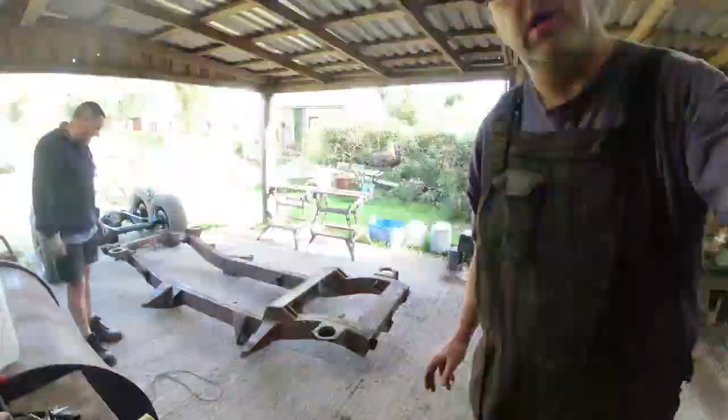So this is the back end of the chassis, off the scrap chassis, off the donor. What I basically did was chop it right off against the middle cross member, the one that the A-frame bolts to, and that the Boge self-leveling strut bolts to, because I've already got that part on here. So that's in good order, and then I've got the rearmost cross member, which is where the tank forward mount goes onto.

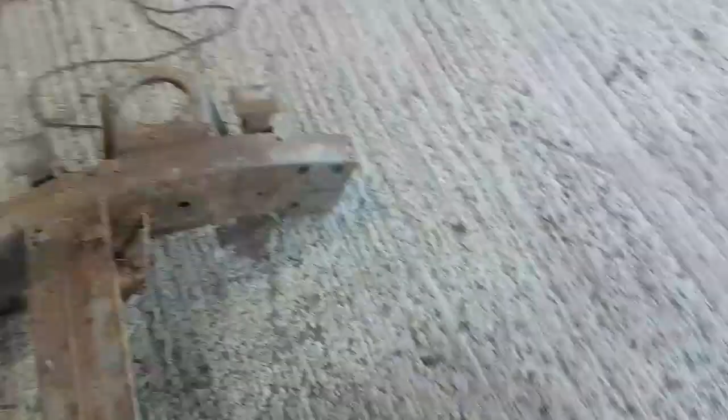And then we're looking at this. So this is the bit that's then missing of that chassis in its entirety. So what we've done here is cut along the outside edge of the butt weld that goes along the chassis.

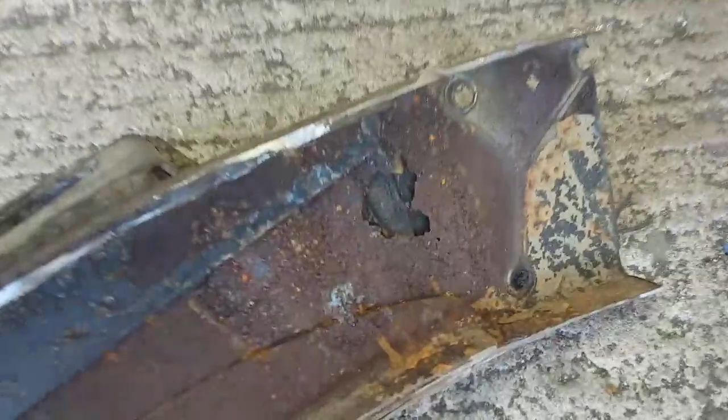The reason I've taken the spring mounts off is because there are holes through the original chassis on the outer edge, and it's been patched, and I'm not terribly happy with it. You can see that, that's not pretty. So judging by the other welds I've been messing around with, I decided I'm going to cut those off.

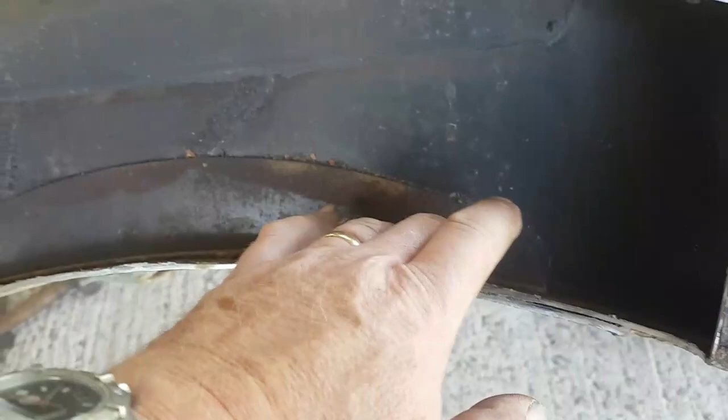That's probably also the easiest way to splice these two parts of chassis back together again. Because on the inside of the chassis rail, you'll notice how clean this is. On the inside edge of the chassis rail, we've got these big half-moon shaped strengthening pieces, top and bottom.

Now I've not disturbed those on the main part of Bob's chassis, and when I cut that in exactly the same way, I'm not going to disturb them on the inside of the chassis. And then it's a case of, we will flap back in here and take off the remains of the outer half of the chassis.

And we'll do the same with that one. We should be able to get a nice overlap weld on this, and the only non-standard weld we're going to get on this is along that edge there.

Now that is most of the bit that I need now. It's upside down, you can see what I've done there. Spring mounts, got the reinforcing plates on the inside. Cut it inboard of the original lap weld.

I'm going to grind all this lot back, cut it gently, see if we can get the two skins separated. So we want the... no, that's wrong, that's just wrong.

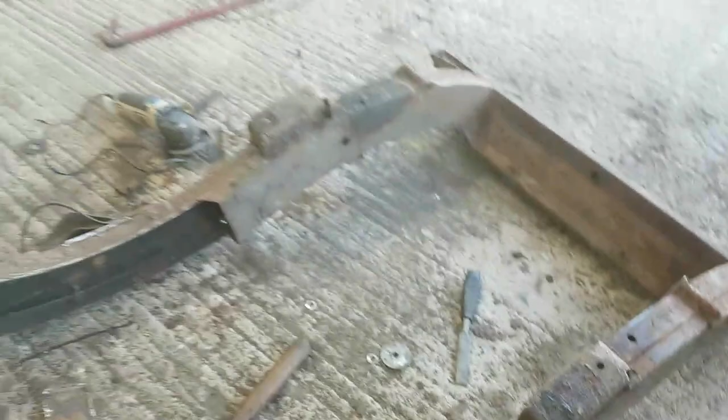And then here, we've got the remains of the inner side, and I'll be able to get that plate off down there. That's good, because I need that. I've got two of those to get off.

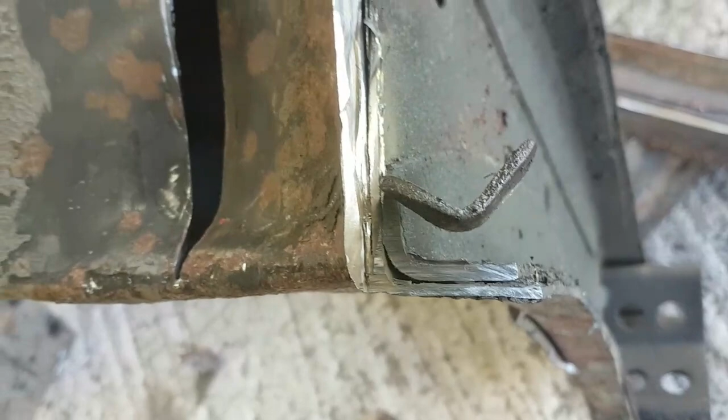But yeah, I think we are getting someplace. Okay, butchered this rear cross member a little bit, but I don't need that bit, I need that bit.

Bloody hell. Now, there is a reinforcing piece in here. I think it's like a top hat piece in there, which I'm going to keep hold of.

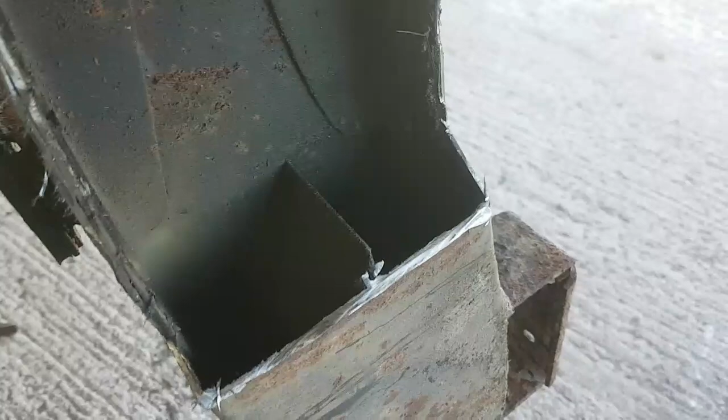And that also explains what some of the stuff was that I found in one of these holes. It's kind of inside the chassis, just by the rear body mount, rearwards of the thing. There's a little top hat welded piece in there.

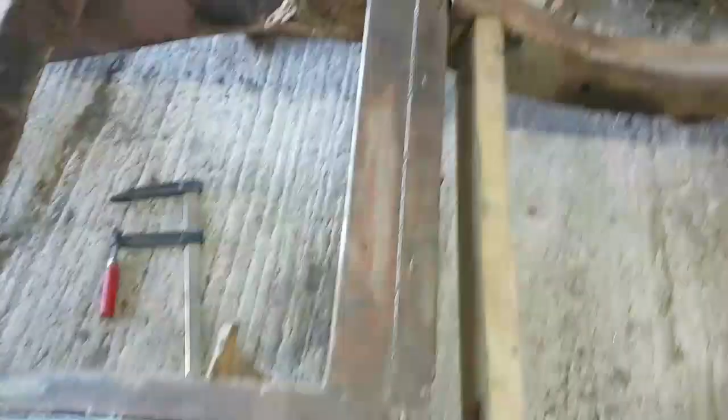As you can see, it's a little bit wider than it needs to be on both sides because I've splayed the chassis rail out by a good half inch. It's probably going to be nearer an inch by the time we get up to here, which will be about right. So I'm going to knock the piece of wood out in a second once I know it's not going to be too much of a wrestle to get into place.

And then it's a case of, as you can see, this thing moves around fairly easily. It's going to be a case of making sure the bottom edge is sitting underneath the flap, which it is. I'll double check all of that. I put a couple of big blobs of weld in there.

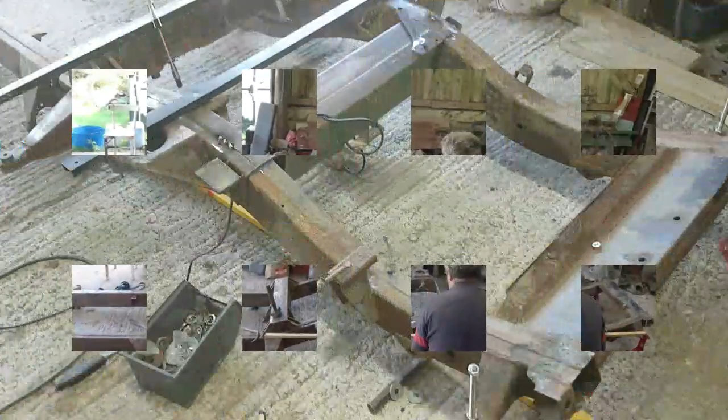Measuring, and measuring. Everything, absolutely everything lines up except for one thing, the wheelbase. And it's doing my fucking head in. So I'm going to double check it now.

So basically if I measure from that point there to the end of the chassis over here, it's right, within a millimetre or two. I need to be more accurate with it, but basically I'm just trying to get the chassis level by putting washers underneath it using my big spirit level, then using drop lines and so forth to get everything right.

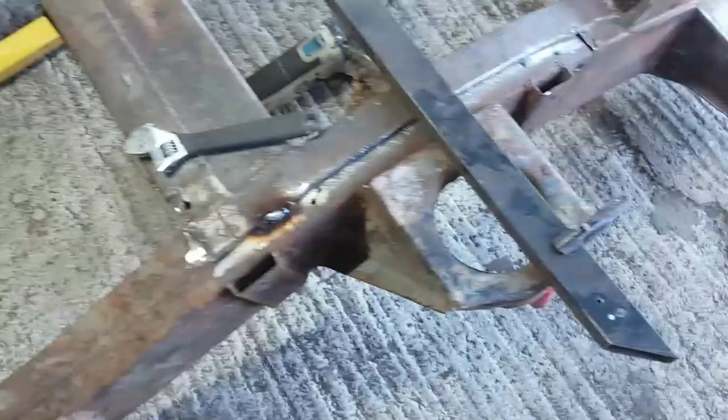I've measured out the centre line of the rear axle turrets as per the diagram, and the distance from there to the back is perfect, which is why I know where the measurement point is, because those turrets were part of the slave chassis, so I know that hasn't been adjusted. It's the distance between that turret and that turret that I'm struggling with.

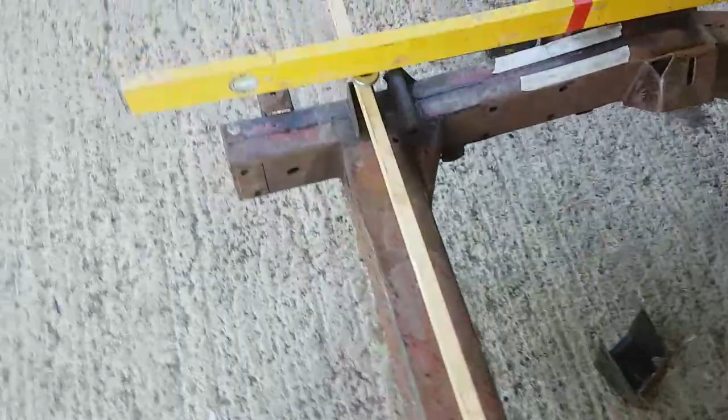It's about 1.5 inches out. We're still measuring. So basically what I've been doing here, just to explain, is the chassis is obviously not level. It's got quite a curve to it, up and down and up and down and up and down.

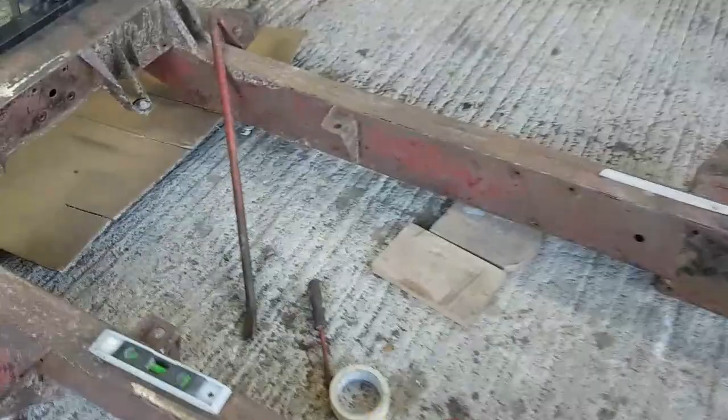So what we're trying to do then is find a level point. We've got the chassis levelled up on the floor anyway, so the centre rail is level. Might need a new bubble for that spirit level soon. And then I take a measurement using washers underneath a cross beam to there.

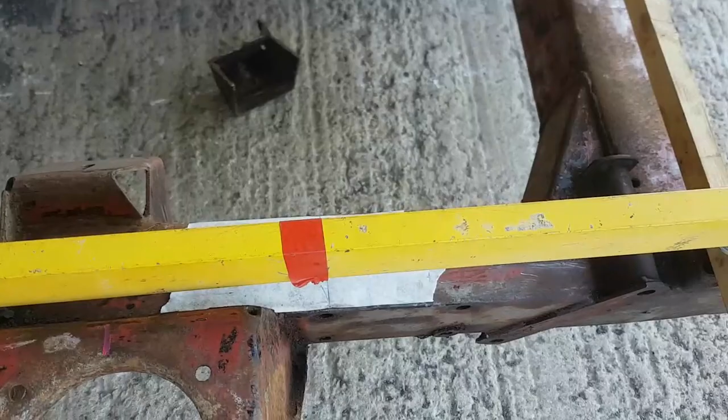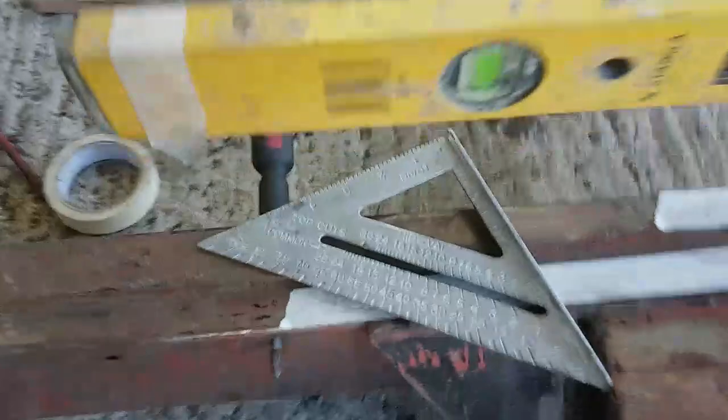I've marked up the measurement for the holes I'm talking about here. So those lines there, I believe, are for the centre of the bolt line that's there. Those lines there for the centre of those bolt lines, they absolutely are perfect. The measurement is perfect. I need to measure down to this fella here, and this was to find the centre point of the

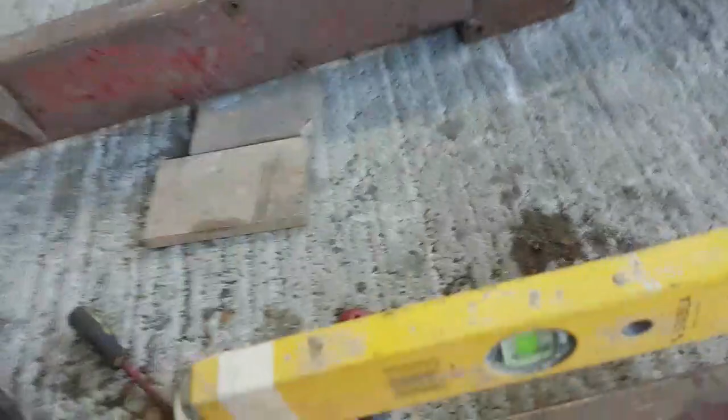front strut. So I balance my right angle on there. It's level and it points at the screwdriver. Okay, I'll get a bit closer than that just by using a straight edge along the edge of it. I measure that, and I'm still getting no real understanding as to why.

Well, this is turning out to be fun, but it's always best to measure 55 times and cut once. So what I've done is I've bolted the original spring turrets back onto this chassis. Not bolted them really, just clamped them on. You can see where the marks were. I haven't really cut any more off this chassis.

I've only ever cut things off the donor part, and I've got this thing so that I've measured between the spring turrets, measured the centre of the turret as I would do normally. I've reset that one based against the baseline, measured the wheelbase: 99 inches.

So I can only assume. Well, I can't assume anything, can I? What the fuck? It tells me the wheelbase should be 100, and I can't get 100 out of it.

Okay, I'll quadruple check this thing. I measured the datum point accurately from the chassis, which is uncut. I even double checked it with that one. I certainly checked it with that one, and that one matched on both sides.

My Pythagoras triangle, by the way, I tried it on the scrap chassis, and it fitted beautifully. So now I've got the start point for the black pole as it goes across there, that piece of black over there. So that goes across, and then I measured

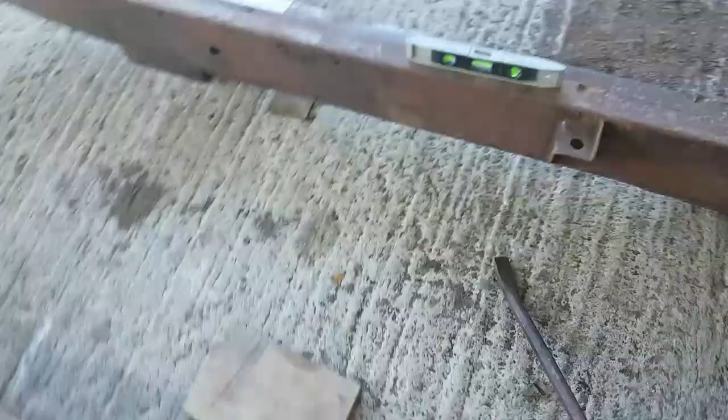from that directly out and marked up the old original spring turrets, which all match up beautifully. I put a straight edge across it, measured it out: 99 inches to the millimetre, or to the thousandth. I don't know now.

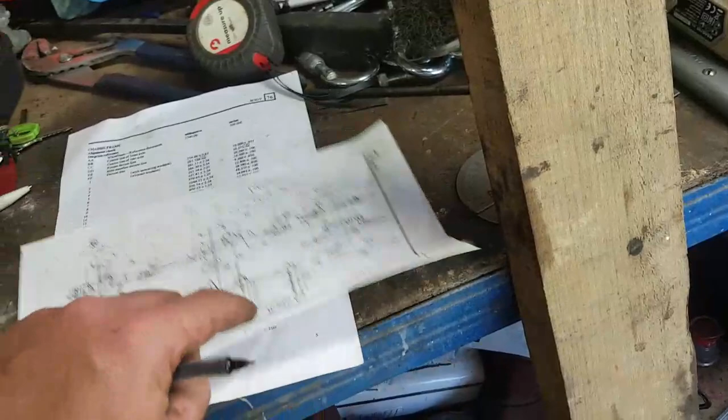Why the fact would they put in it that it's 100 inches when... I mean, I don't know. I really don't know. And I've even been marking out 30 centimetre increments and 12-inch increments, double checking belt and braces all the time. And I cannot get this thing.

So I'm absolutely confident now. FF as a datum line is in the correct place. CC, which is the centre of the rear axle, has a gap here. Why is there two lines there?

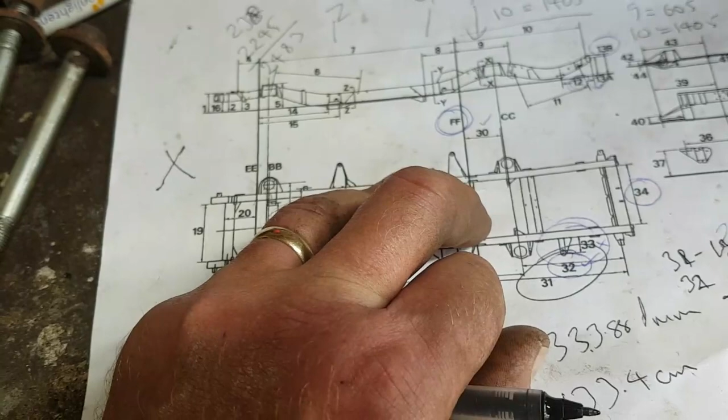Why is there two lines? Okay, let's do this now. So 31 less 32 is 408. That's different.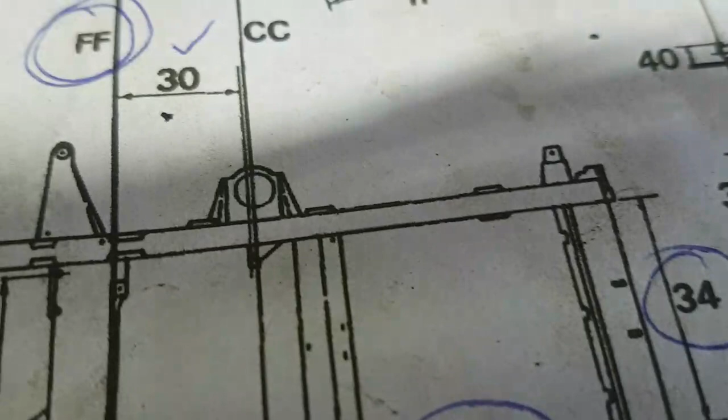I've been thrown out by this figure here, because if you look really closely, there's two lines there. CC is the line that's furthest over to the right, which is 31, the overall distance from the FF datum line to the back of the vehicle, less 32, which I've got as 408. So let's try this again now.

What I've basically done is gone back to the original manual. I've printed out the two pages which go through the chassis alignment and various reference points, with the measurements in millimetres and inches, and it gives you the tolerances. So you have to look at the number, find it on here, and it gives you the measurement you should be looking at.

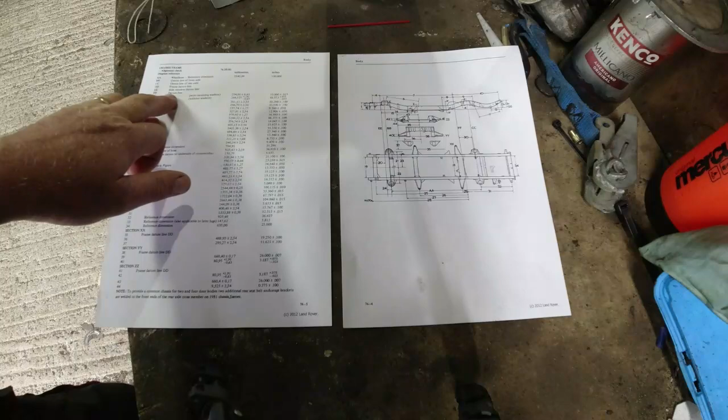All I can suggest is that you work out what the main datum lines are first of all. So I'm predominantly working on the back end of the chassis here, and I'm going to work with FF as a datum line. I'm trying to build some structure around the work I'm doing and some of the anomalies, the false positives that I'm getting, like the 99-inch wheelbase. I think I'm getting to where we need to be heading with this.

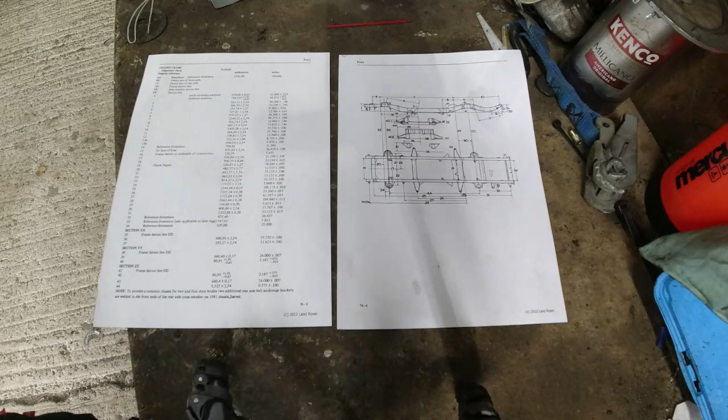So on this sheet of paper, I've captured the image, blown it right up, then painted over it. The blue line down here is AA, between the centre line for the front and back axles - that's what I want to be measuring, that's what I want to be 100 inches. The red line, FF, is the datum line which works for most of the back end of the car - that's how you align the springs and so forth.

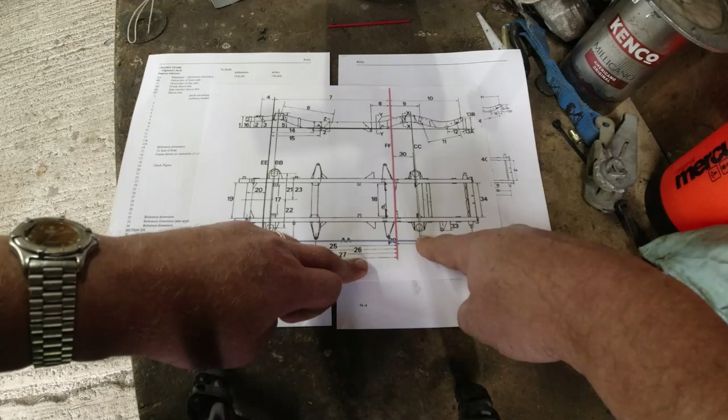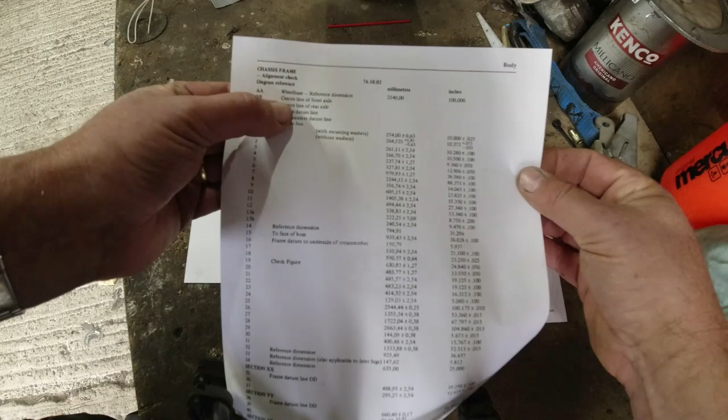CC is the centre line for the rear axle - I know it's a little bit off centre, but the diagram went in a little bit skew. BB is the centre line for the front axle. All of these things are explained right at the top here: AA is wheelbase, BB centre line of front axle, CC centre line rear axle, DD frame datum line, which is off the end of this picture, and that's where we go.

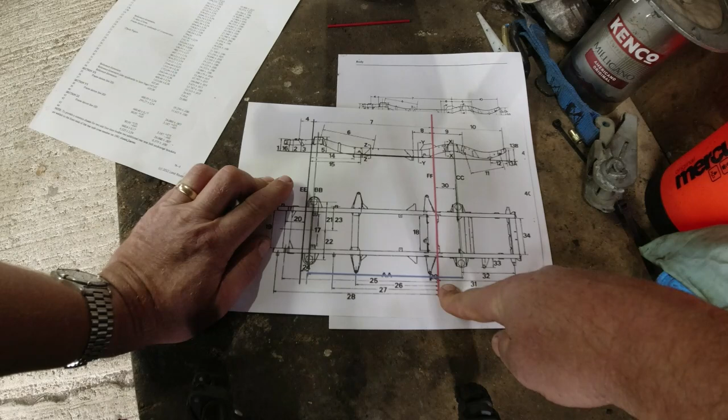So the frame datum line actually runs along the bottom of the main chassis rail, right the way along. Part of the problems I've been having - there's two or three issues - first and foremost, I didn't get FF aligned correctly. I don't know why, because I just assumed that FF actually sat on the top corner of the chassis rail that runs across.

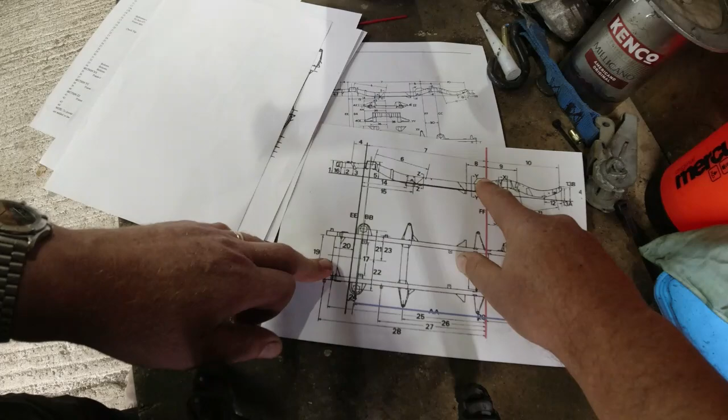However, when you look at the diagram, in fact, the version I printed from, it looks okay. Now if I get a zoomed in version of that - did I do one? No, I didn't, but I can tell you now that it isn't on the top corner. It's further back - it actually hangs over the top of that, or over the end of that rail.

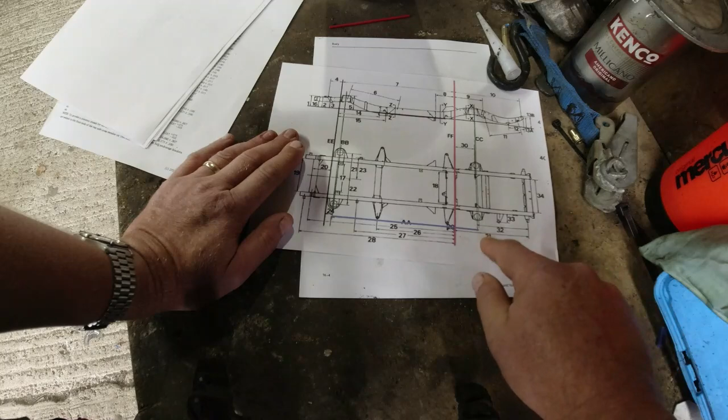So what we need to do first and foremost on this car is establish exactly where FF is as a datum line. Now because I'm missing the back end of the chassis, I couldn't use this measurement here, 31, in order to establish it. I'll use that when it comes to aligning it, but what I need to do is establish this red line first and foremost. So there are three or four different measurements I can use here.

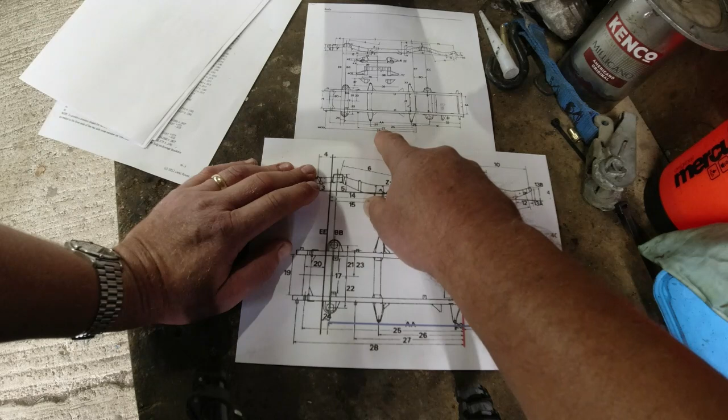We've got this one here, 29, which is from the rear sill mount - that's been welded, so I'm not necessarily keen on that one, but I can use the other measurements just to confirm it is correct. So 25, 26, 27 and 28 are all measurements down here that will establish where that FF line actually is. The 28 goes right the way to the front of the car, and if we look up, it goes to the centre hole. Probably easier if I just show you. Goes to there.

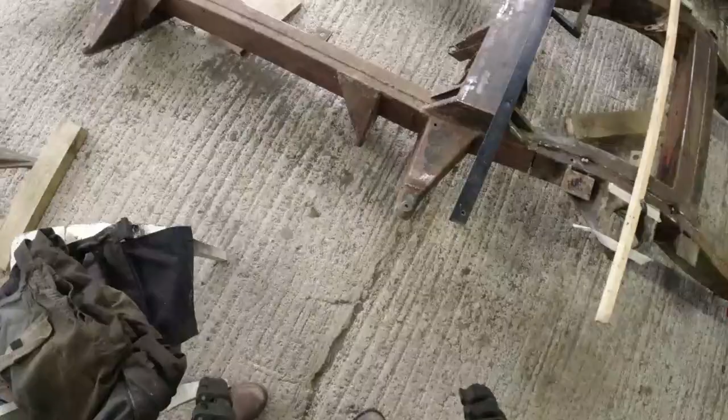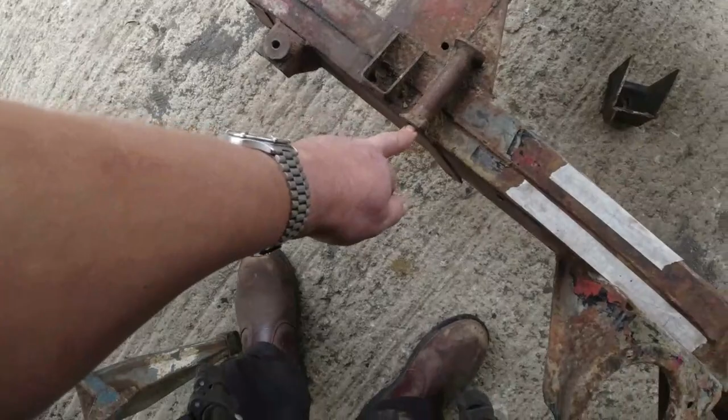That's 28. 27 goes to the bulkhead mounting. 26 goes to the front sill mount. 25, and 28 goes to the front mounting. So 28 from there, 27 from there, and then we've got that one, and all of those should come to exactly the same point here.

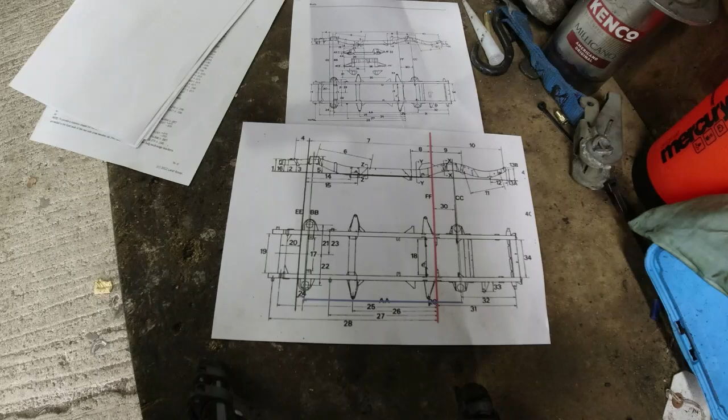And that should give me this point here, FF. So that's the first problem I had. FF was not in the right place because I assumed, and we know what assumptions do, they make an arse out of you and me. So, mother of all fuck ups. Now I've got a better reference for point FF.

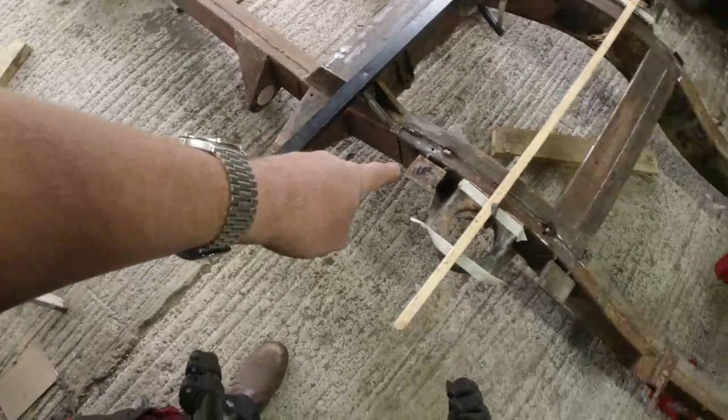From that point I can then measure out to the back end of the chassis using reference 31, which is from FF out to the rear crossmember mounting. Excuse me, a little tickle cough there.

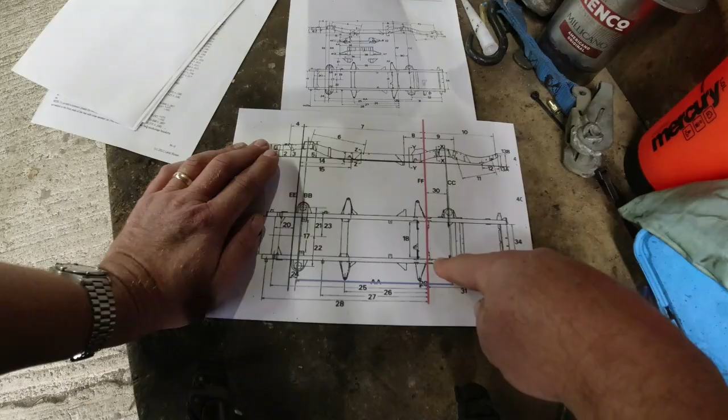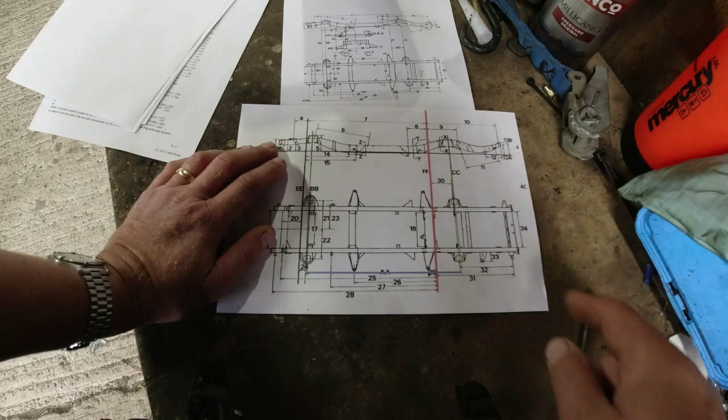Now 30 was a red herring, because when you zoom in on it - that's front axle, that's cross member, rear axle. 30, there's two different lines, and it's not quite as far here. So 30 is the line that takes you to the front of the seatbelt mounting here. Seatbelt mounting, okay?

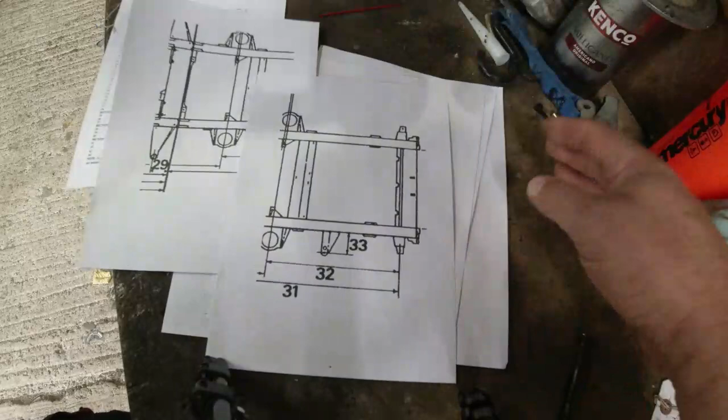That caused me confusion initially. I think when it comes to looking at these diagrams, it's all well and good looking at a nice engineering diagram like that, but it'd be better if it were printed A2 or A1 size, because then I would have noticed that. On this diagram it's nice and clear, but when you get grubby handprints all over it, which is what I was using yesterday, sometimes you think, can't quite see this. And that was all yesterday, shite.

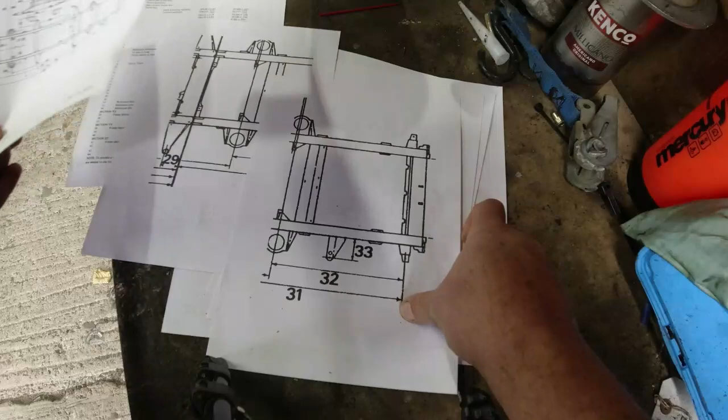So looking at this, we can fairly easily get the centre point for the rear axle, and we can fairly easily get point FF now by using these measurements, and then the centre point of the rear axle. So I'm fairly confident now that everything lines up. My biggest concern here was that the centre line from the front to the centre line at the rear was just over 99 inches, and it should be 100.

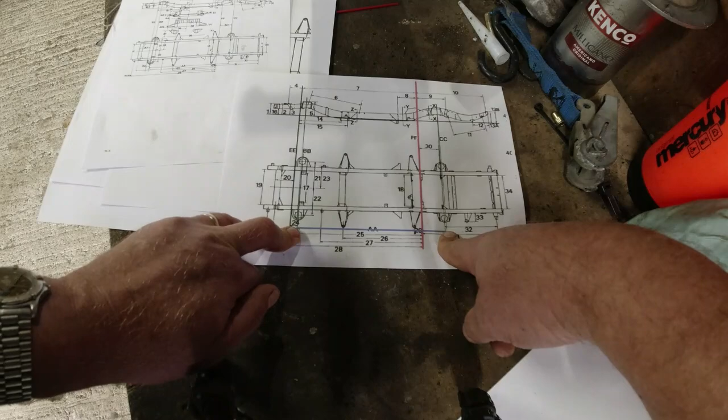So then I'm thinking, well, what the actual fuck? What is going on here? This is driving me up the wall. And I woke up last night and thought, let's have a close look at those diagrams, because we had a double line here. Shit, there's a double line there as well.

Wankers. So what I was doing to get the centre line of the front axle was measuring from the front cross member, the outside edge of that, to point EE. Point EE - front cross member, point EE is this line here, and it's a front datum line that goes right across the chassis, and it more or less lines up with the holes for the steering box either side.

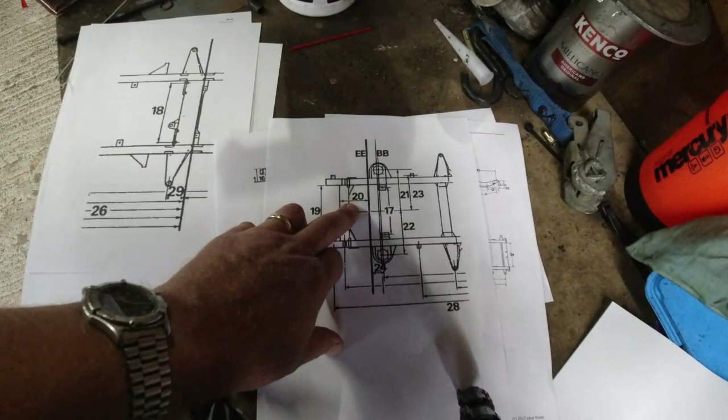So what I was doing was taking reference 20 from the front of the chassis to establish where EE was. Happy with that - this isn't EE telecommunications, it's just a reference number. And then adding to it 24, because that seemed reasonable to me. 24 would then give me BB.

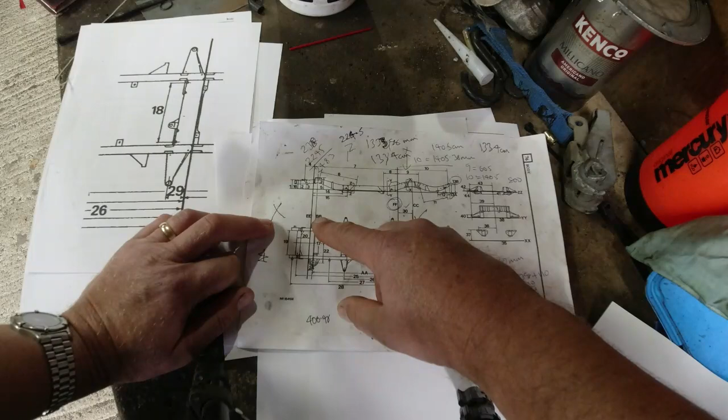Now, this diagram, which is the one I was working from yesterday, actually confused me because BB is there, and you think, okay, BB's right above that line. EE's there, BB's there, can you see that? If I bring it in real close, you can see - this is printed out from the older manual, from the 1971 book. All of a sudden we've still got these two lines, but BB's all the way up here now.

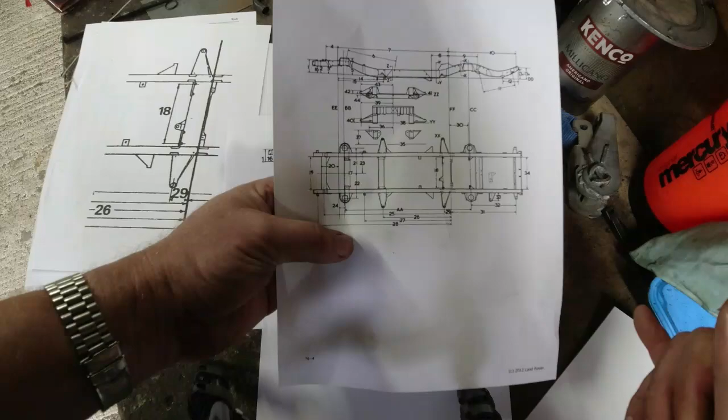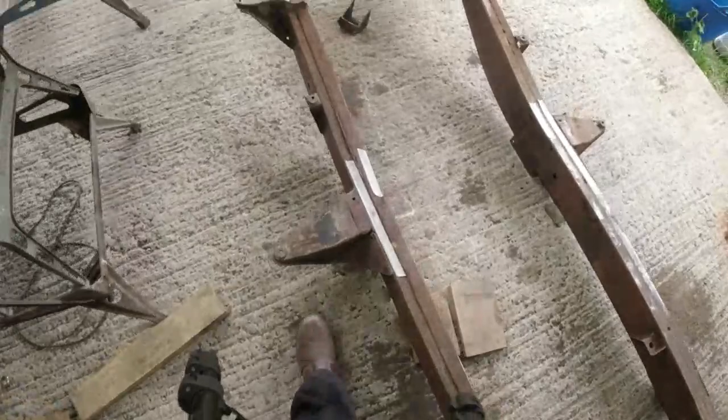So that second line there isn't BB. And this is what I saw this morning and thought, bugger. Right, so if we ignore that BB there, we've got these two lines. One of the lines is the leading edge of the engine mountings. So here I've got a nice reference point from that line to the edge of the engine mounting, and I know that - I basically know where, because I need to weld that engine mounting on still, and there it is. So I've got that reference.

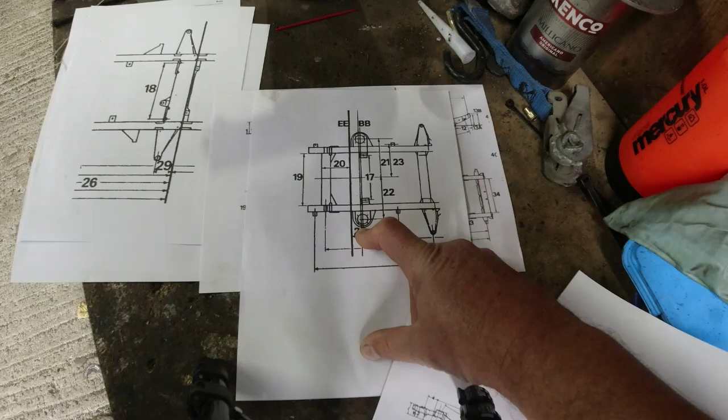That's what 24 gives me. It doesn't give me the centre line of the front axle. So what I've done is I've put the centre line for the front axle further back towards the rear of the car than I should have done. How fucking stupid is that? And that just shows you how accurate you need to be with these things.

So effectively now, by moving the centre line further forwards, I'm going to get over 99 now, probably the full 100 inches. And I think the back end here has been welded in the correct place, and I am comfortable with it.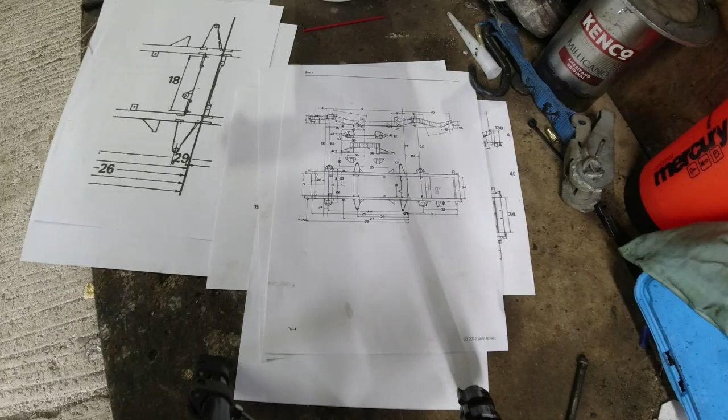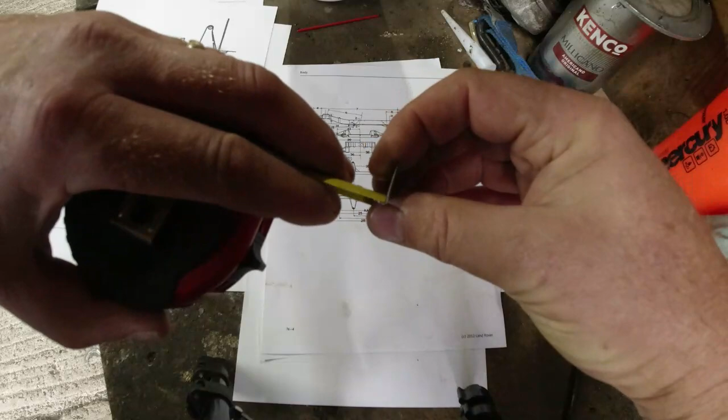What I'm going to do though, for an absolute belt and braces approach here, I've ordered myself a fabric tape measure, rather than a metal tape measure. I wasn't actually using this yesterday, but the problem with a metal tape measure is it's designed to hook over something, so in your 1 mil section you're sometimes getting a false reading because of that edge there. I used this one because it's got a flat edge on the end, so I was able to hook it over the wood and pull it out. Then you've got a millimetre and a half of movement in that thing, so that's not going to help.

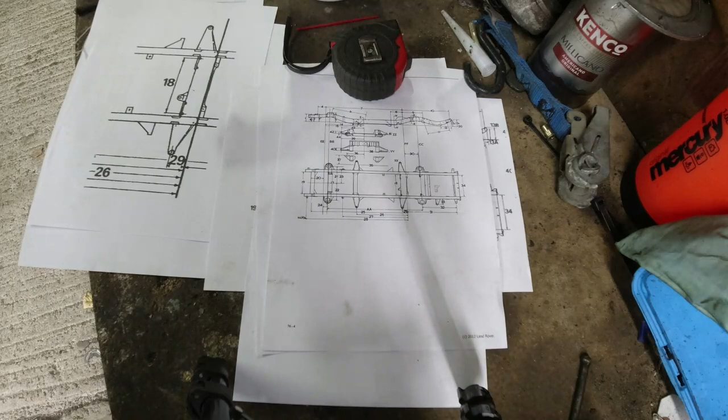So what I ended up doing was using my straight edge, my big long spirit level, and I marked out using my engineer's 300 mil ruler, measuring along that to get rough measurements of exactly where things go. I know that I measured those exactly, but everything else was just double checking. I ended up measuring these exactly here, just to get that datum point right, which is where I realised mistake number one.

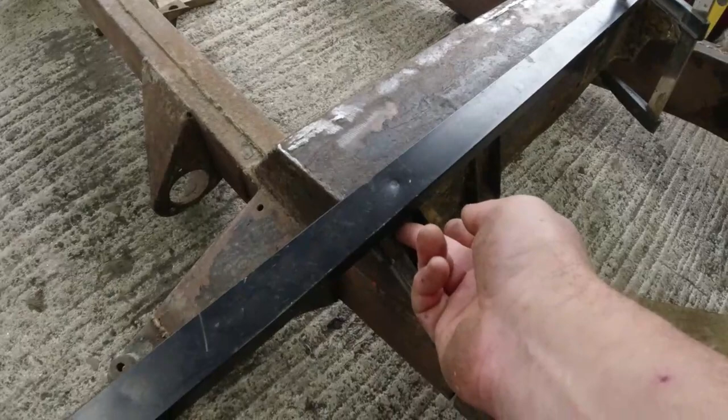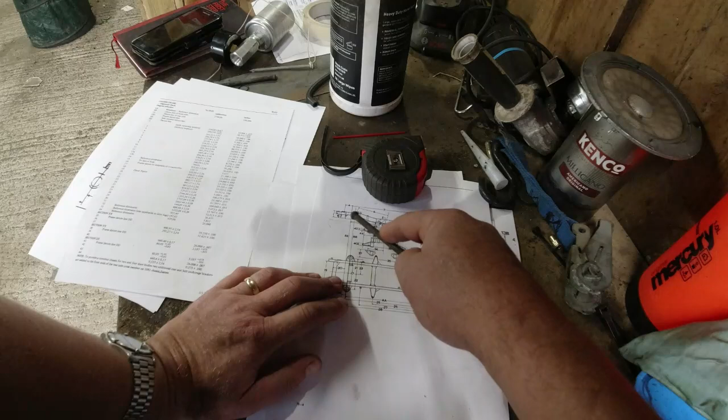The other thing that dawned on me last night: that is not level. So what I need to be doing is looking at the bottom corner of that. I was doing that at the end of the testing. And you've actually got DD, which is listed on here as the frame datum line. This is the line from which all the measurements take place. Because if you've got a chassis going up and down, point A to point B on DD is going to be shorter than point A up here to point B down there, because you've got a hypotenuse.

So I'm reasonably confident I've got this thing back in the right location, and it was worth doing this exercise because that gap was more or less closed up the first time I welded this up on both sides. I realised my mistake with point FF, realigned it all, and it's gone back by about 6 mil. So it's gone back by that much. Now we've got a couple of good tag welds on there.

I can tip this chassis upside down when I get ready to measure it, because then I've got the underside of the main chassis rail, which is my point DD, and everything using a plumb line will be measured from that point. I'll be able to accurately mark out the centre lines and the alignment and make sure that everything is spot on.

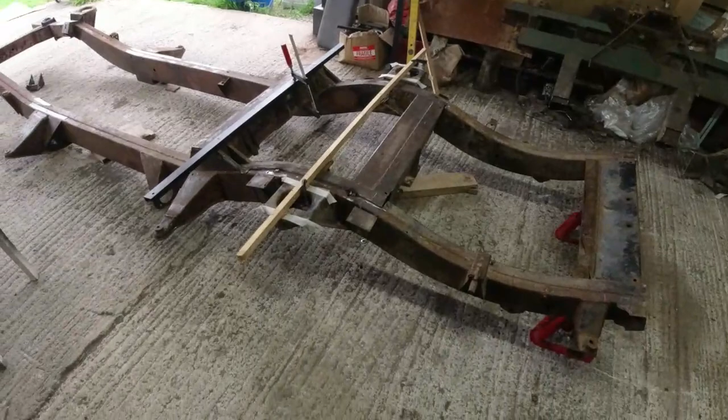I even measured from the underside of the chassis, shimmed out using a long spirit level, that 2 metre spirit level over there, very useful. I got it level, then used a drop line from the mounting on the corner there, and it was exactly the right height to the millimetre. So I'm confident now that it was in the right location and orientation. I think my 99-inch issue was a false positive because I measured this front axle centre location incorrectly.

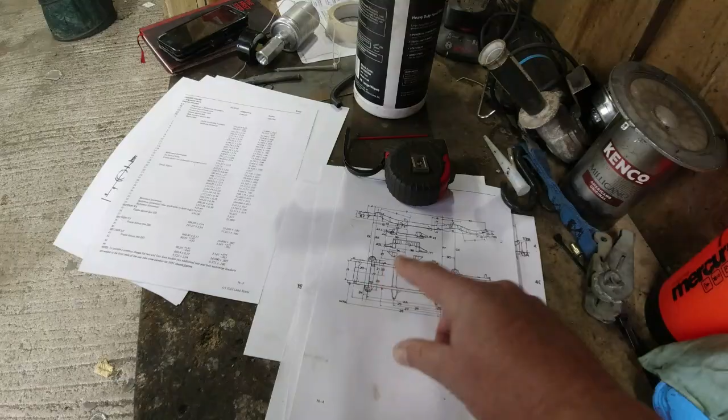So, enough rabbiting. Next steps: get this thing upside down, get myself a fabric tape measure that's going to be much more flexible, get a suitable person to help me hold one end in a fixed location while I measure the other ends, and I think this thing's going to work out beautifully.

Right, so going through the practical exercise here, you notice I just moved it. I'll double check this in a second. That did move. Right, I can do that again.

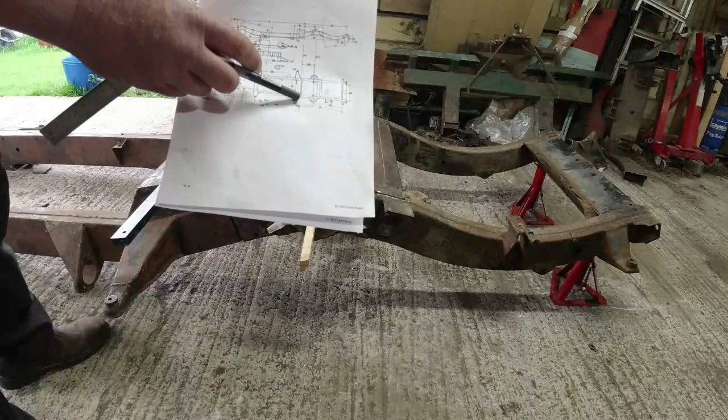I know that bottom edge along there is where line FF should be. FF on the diagram is the datum point that runs 3/4 of the way down the chassis. So that I'm happy with. What I need to do now is measure from FF out to the rear body mount over there. I'll show you how I do that, and when we know that's in the right place, we know the spring is in the right place, then we can deduct 32 from 31 and get the distance from the centre point to there. So let's go ahead and do that.

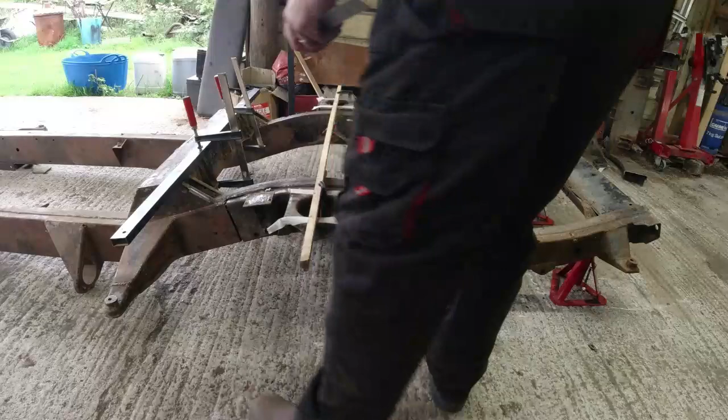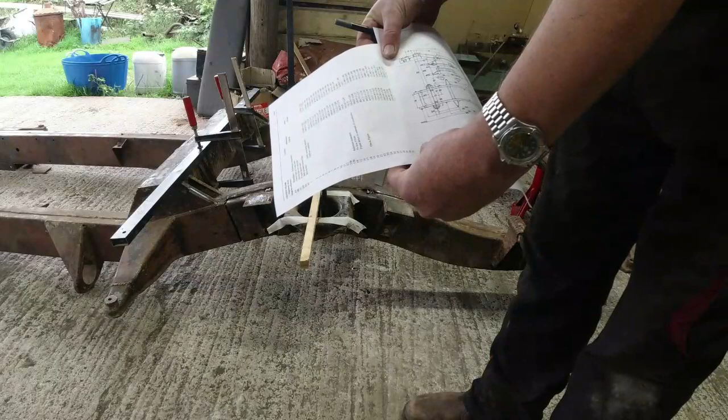Now, because reference 31 is on here, we'll do it in millimetres. Reference 31 is 1,333.88 millimetres. Okay, 133.4 centimetres we'll go for. And I get my straight edge, which is over here. It's probably on here already.

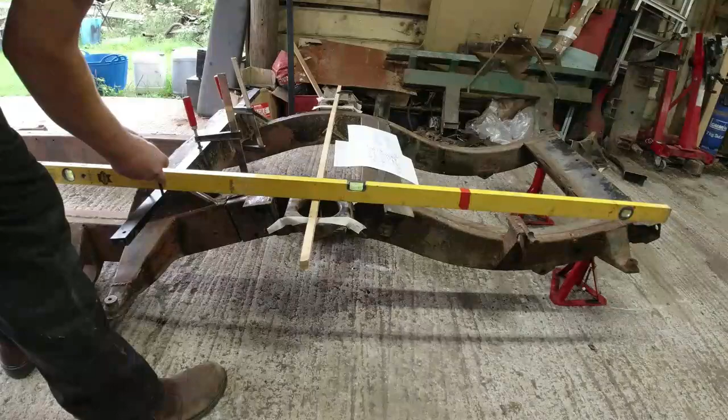133.4. So if I balance that on there, what I need to do is put 133.4 centimetres on that bit, get myself a zip tie. Here's one. Here's a friendly zip tie I borrowed earlier on. And all I was doing was put that around there. Is that going to be too much, that zip tie? Yes, it's going to be too much. Give me 1 second.

Right, so all I'm doing, because I'm working on my own, get a zip tie, pull them around this end here, and do them up until we know that the spirit level is level. That's it. Right angle. I've got the right angle. What I want to do now is take my reference point, which is 133.4, and I want to put my right angle against it, like that. I know my yellow spirit level is level, and then I butt it up against the bottom edge of the black FF point.

The other thing I need to make sure is that I am in line with the bolt hole at the end, and that will come clear in a second. So we are obviously doing this with a fabric tape measure, which is going to make life so much easier. But I've measured this about 15 times now. Right, so that is in the right location. We'll put that there. Next thing we need is a small spirit level. We need this because we need a right angle at this end and my ruler. In fact, I'll probably just do this one with the tape measure. What I need to do now is to measure this to the middle of this hole.